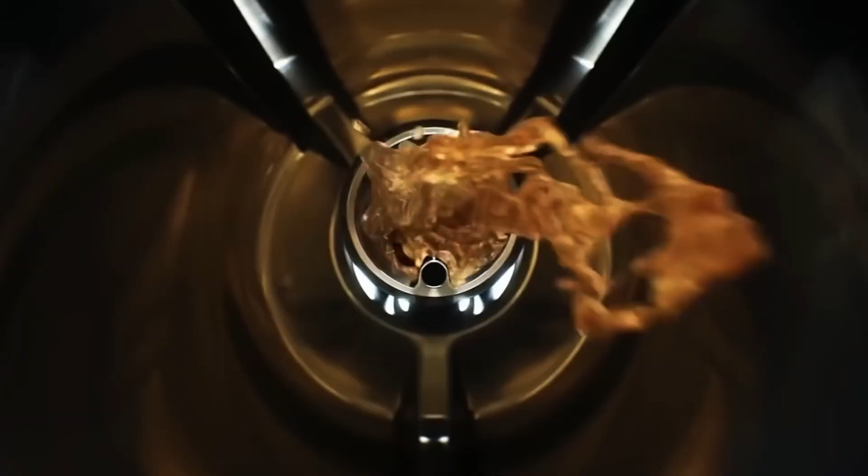The United States alone consumes over 7 billion liters of fuel daily, powering 800 million vehicles worldwide. But have you ever wondered how that fuel gets from deep underground to your gas tank? This is the complete story of petroleum, from the massive Texas oil fields where companies like Occidental drill one new well every day, to the sprawling refineries where crude oil is heated to 370 degrees Celsius and transformed into the clear, powerful fuel that makes modern life possible.

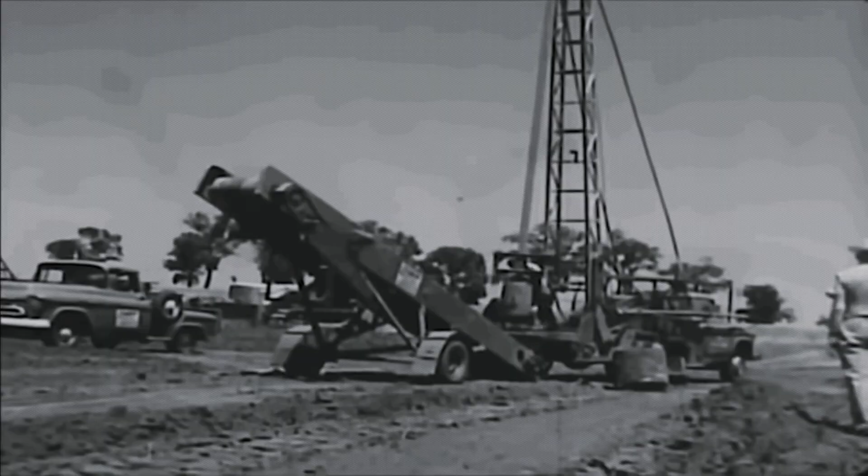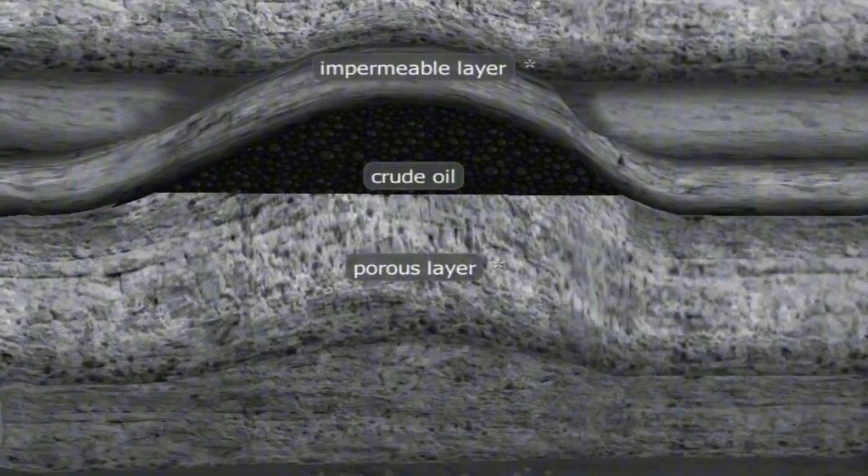What if I told you that the fuel in your car was once a living creature millions of years ago? It's a fascinating transformation that begins deep beneath the ocean floor. When ancient plants, animals, and microorganisms died in prehistoric seas, they sank to the bottom, gradually becoming buried under layers of sediment. Under intense heat and pressure, these remains underwent a remarkable chemical metamorphosis called catagenesis.

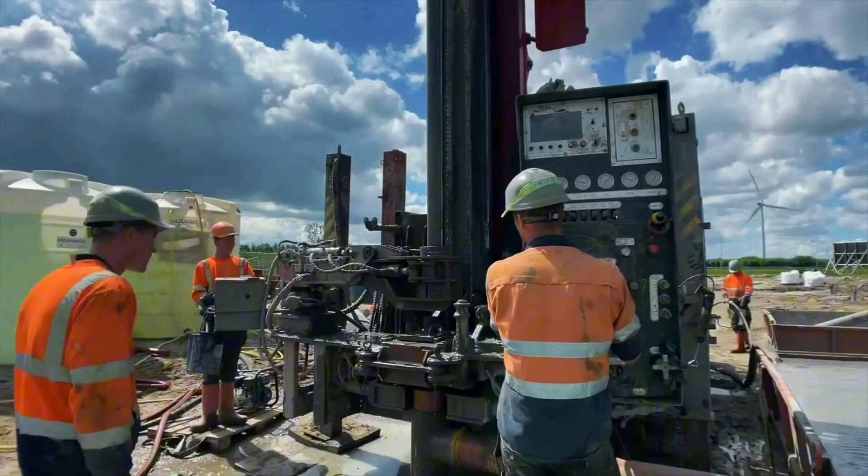This process didn't happen overnight. It took approximately 250 million years for these organic materials to transform into the hydrocarbon-rich substance we know as crude oil. Think about that time frame, 250 million years to create what our modern society consumes in mere decades. This stark contrast highlights our relationship with this finite resource. The oil powering your morning commute represents an ancient energy bank that took geological eras to deposit, but is being withdrawn at an unprecedented rate.

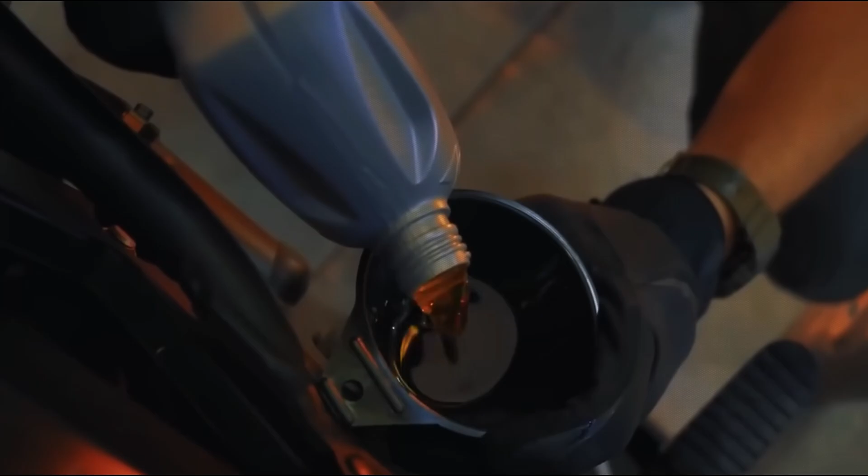Before we can use this sticky, smelly black liquid, the primary raw material for gasoline, we first need to find it. Modern oil exploration has evolved dramatically since the industry's Texas beginnings in 1894. The real boom started in 1901, but today's methods bear little resemblance to those early days. Finding oil beneath the Earth's surface requires sophisticated detection methods.

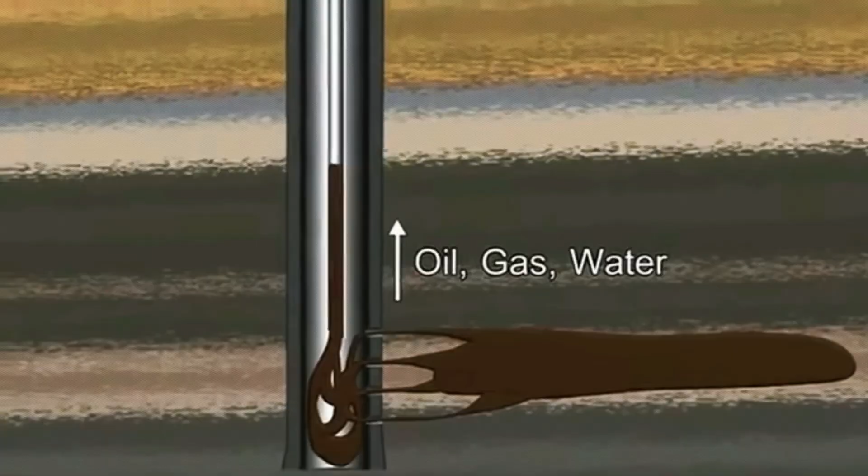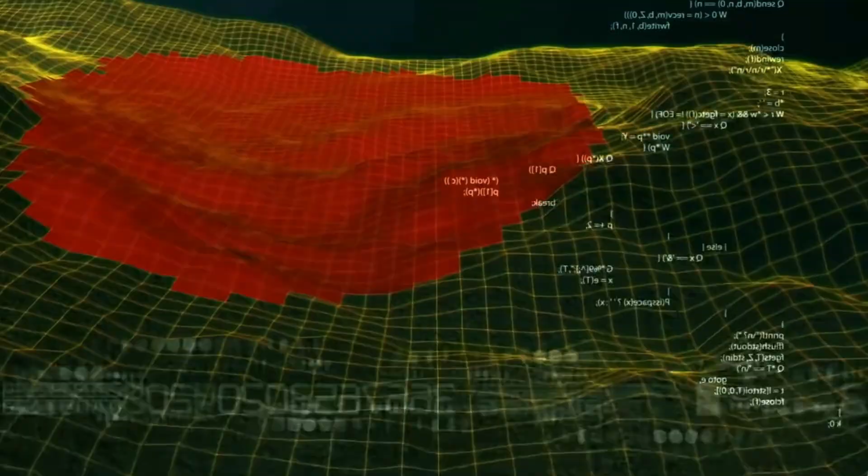Geologists now employ advanced seismic technology that works by generating sound waves that penetrate deep underground. These waves bounce off different rock layers and return to the surface, where sensitive instruments record them. By analyzing the time these waves take to return, experts create intricate three-dimensional maps revealing potential oil and gas deposits.

When examining these maps, geologists look for specific geological formations that typically trap oil. They search for anticlines, upward-folding rock layers, salt domes, and fault traps, structures that prevent oil from migrating further upward. They also identify porous reservoir rocks like sandstone or limestone that can hold oil, topped by impermeable cap rocks that seal it in place.

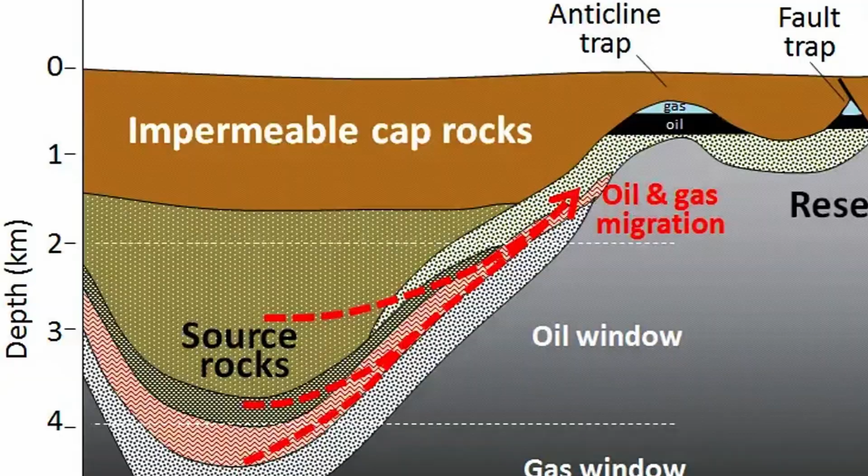Despite these technological advances, finding oil remains a calculated gamble. The subsurface geology is notoriously complex, with unexpected variations that can turn a promising prospect into a dry hole. Yet the scale of operations in places like Texas demonstrates both the economic incentive and industrial commitment to this pursuit.

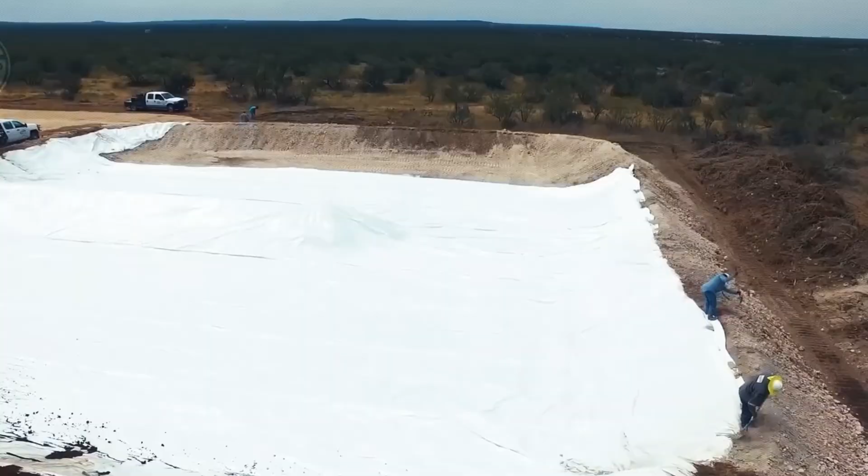The sheer magnitude of drilling operations in Texas oil fields is staggering. Each month, over 2,000 new wells puncture the Texas landscape, collectively extracting more than 900,000 barrels of crude oil daily. This continuous drilling is necessary to maintain production levels as existing wells gradually deplete.

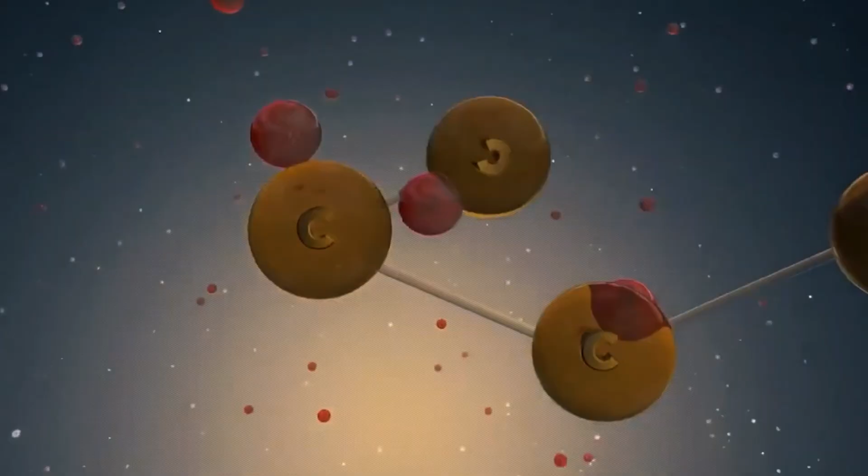Major players like Occidental Petroleum exemplify this relentless pace. To sustain their production targets, they drill approximately one new well every single day. This constant activity represents billions in investment and thousands of jobs, all dedicated to extracting a resource that lies thousands of meters beneath our feet.

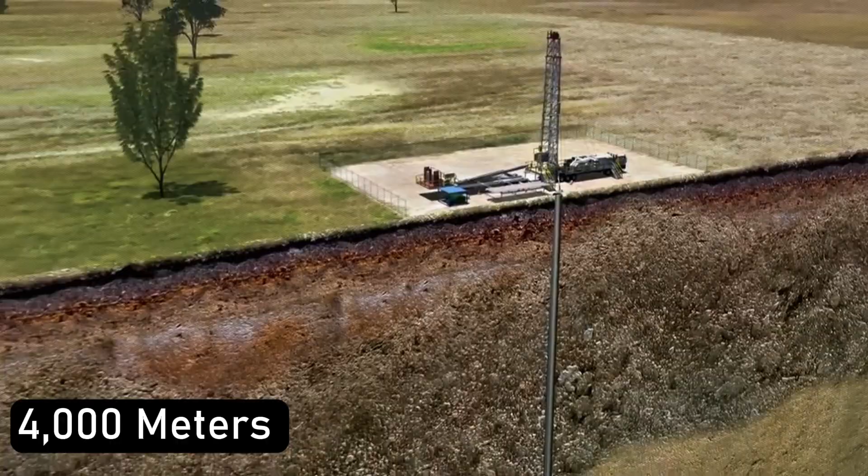The journey to reach these deeply buried deposits is an engineering marvel. Modern drills must penetrate up to 4,000 meters, nearly 2.5 miles, through various rock layers to reach oil-bearing formations. At these depths, drilling teams encounter extreme pressures and temperatures, while navigating through different geological strata with specialized drill bits and mud systems that lubricate and cool the equipment.

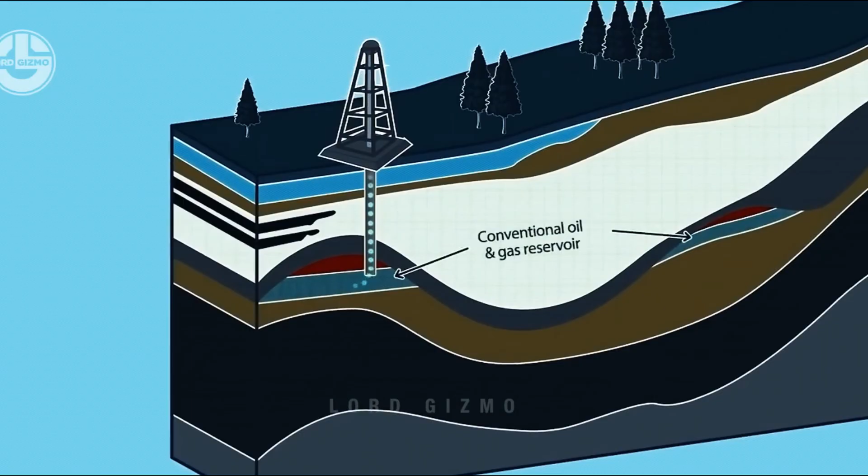Once a promising location is identified, engineers deploy seismic instruments that provide astonishingly detailed 3D maps of underground formations. These technological wonders allow them to visualize oil deposits with remarkable precision, identifying the optimal drilling points and potential extraction challenges before a single drill bit touches the ground.

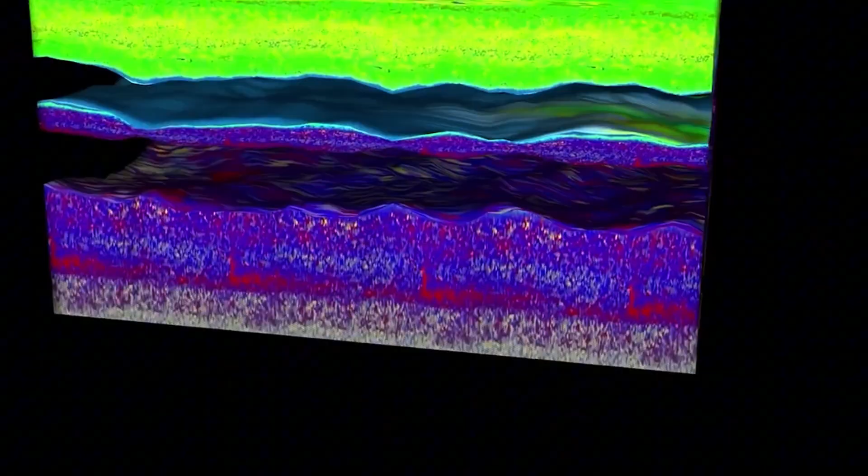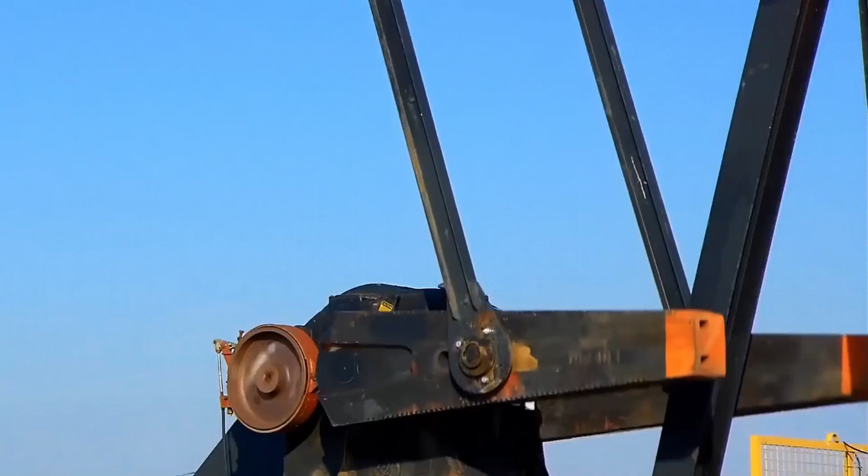While the seismic imaging technology pinpoints exactly where our crude oil resides, extracting it is merely the first challenge overcome. The viscous black liquid emerging from the wellhead bears almost no resemblance to the clear fuel it will eventually become. And between these two states lies a perilous journey, spanning thousands of kilometers through a complex web of pipelines few ever witness.

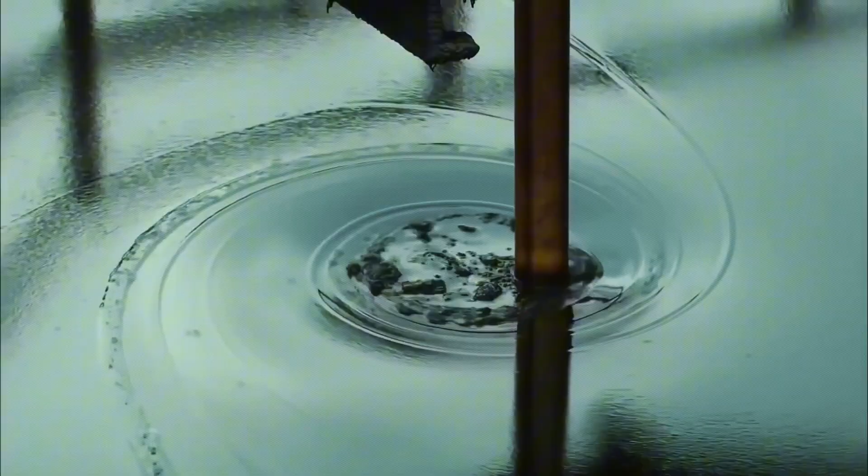This extracted crude oil, thick, sticky, and almost tar-like in consistency, must now travel approximately 1,000 kilometers to reach its destination. The journey connects two critical points in petroleum's life cycle: the extraction site where it emerges from the earth and the refinery where transformation occurs. Without this crucial transportation link, all the sophisticated extraction technology would be meaningless.

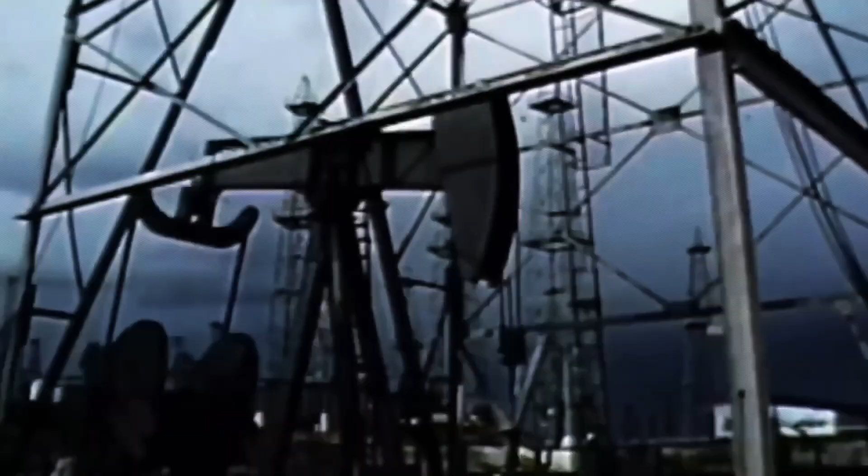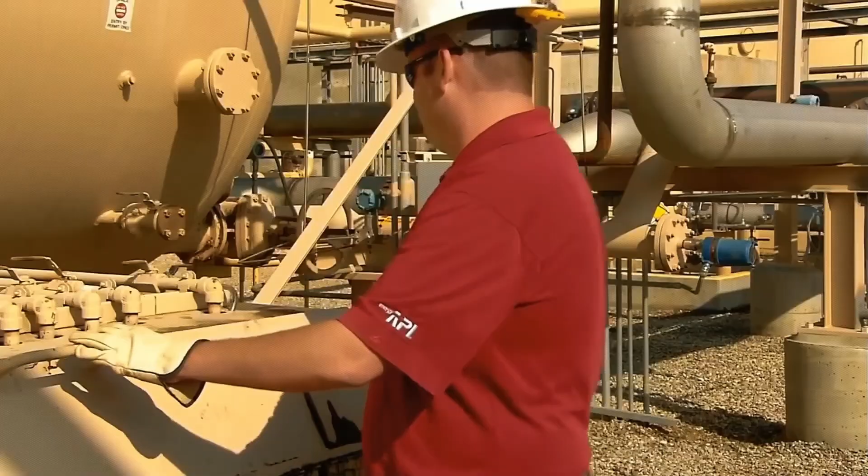The logistics of moving millions of barrels of highly flammable crude oil daily presents extraordinary challenges. A single pipeline rupture can release thousands of barrels into surrounding ecosystems within minutes, potentially devastating local environments. These concerns necessitate stringent safety protocols throughout the transportation network, with constant monitoring for potential weakness or damage points.

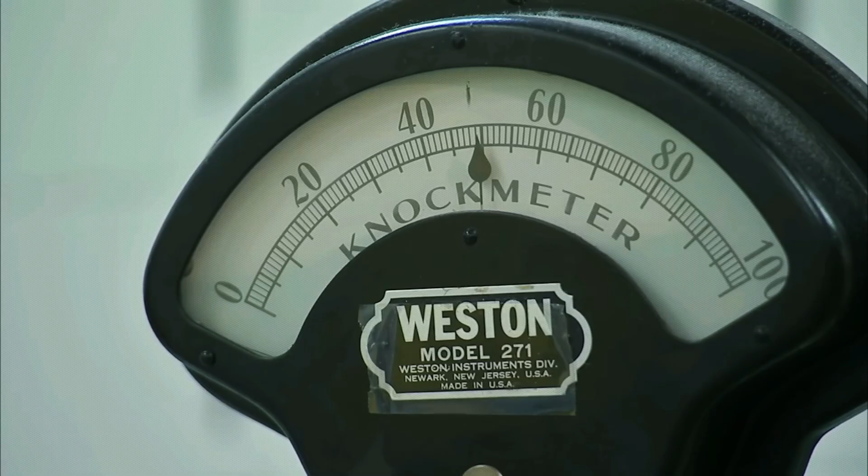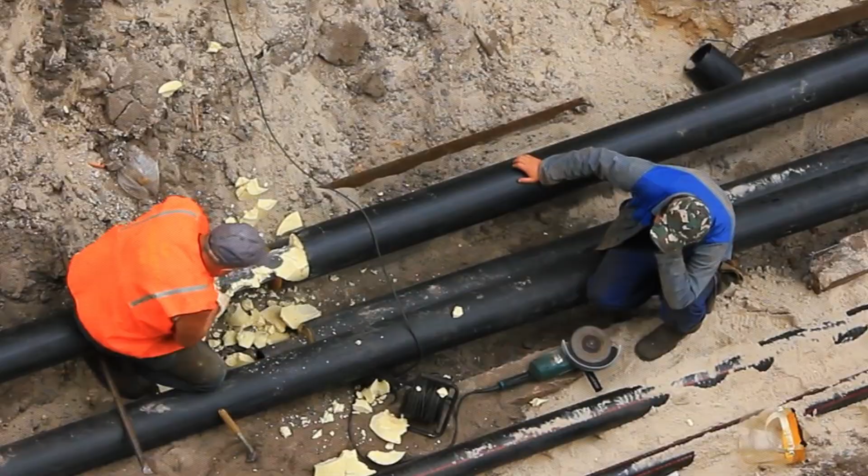Pipeline systems form the silent arteries of our energy infrastructure, efficiently moving crude oil across vast distances through an intricate network that operates largely unseen. These underground pathways consist of specialized pipes designed to withstand tremendous pressure while carrying volatile materials. At regular intervals along these routes, pumping stations maintain the necessary pressure to keep the crude flowing smoothly toward its destination.

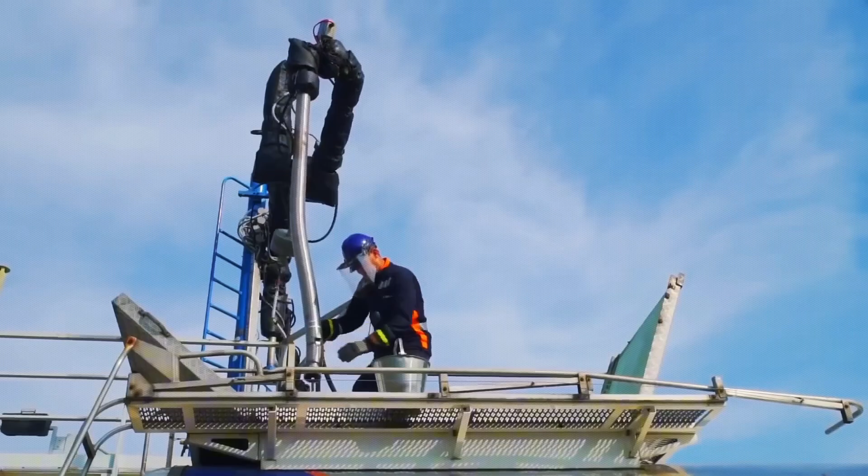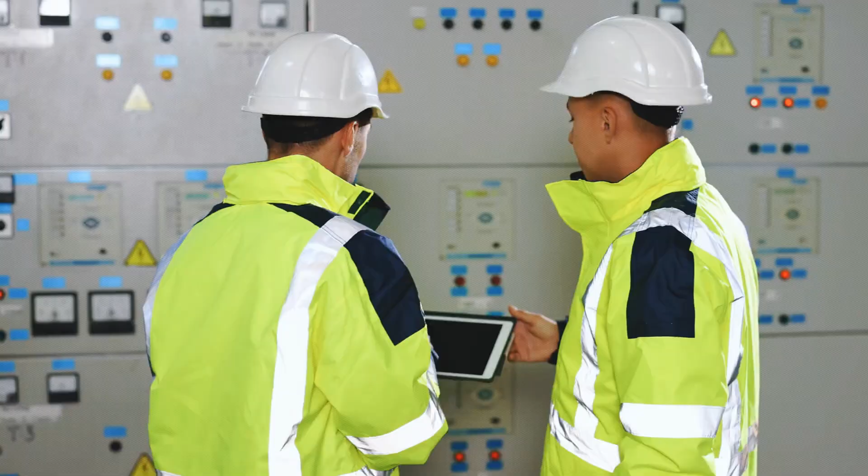These pumping facilities are engineering marvels in their own right, using precisely calibrated systems to maintain optimal pressure throughout the network. Too little pressure and the thick crude stalls, too much and pipes risk catastrophic failure. Engineers monitor these systems around the clock, making minute adjustments to accommodate changing volumes, viscosity variations, and environmental conditions that might affect flow rates. After its long journey, our barrel of crude finally arrives at its destination, America's largest oil refinery.

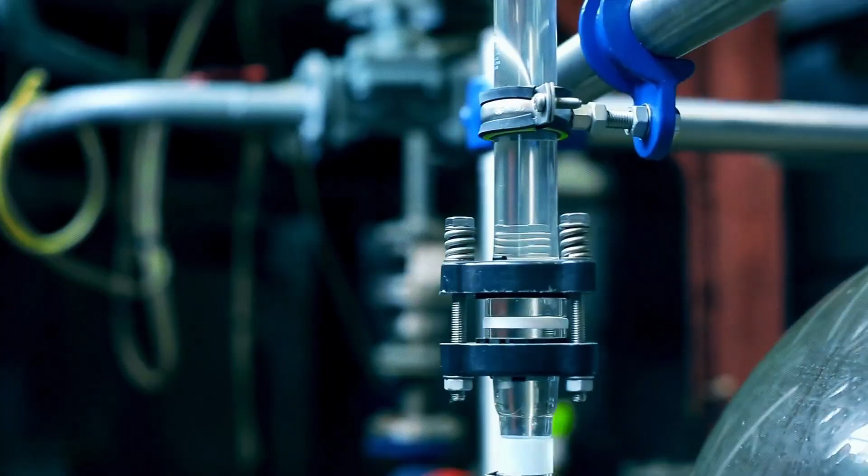This massive industrial complex spans an impressive 10 square kilometers and processes an astounding 562,000 barrels of crude oil every single day. The sheer scale of this operation becomes even more apparent when considering the 4,000 workers employed here, who collectively use over 1 million ear protectors annually just to protect themselves from the constant industrial noise.

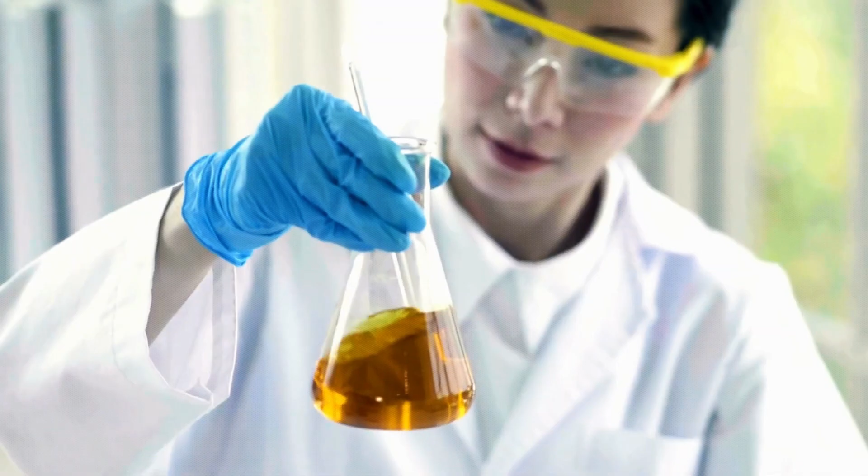Before any processing begins, each incoming batch of crude undergoes rigorous quality assessment. Laboratory technicians analyze samples to determine the oil's specific composition, which varies significantly depending on its geological origin. These tests reveal crucial information about the hydrocarbon mix, sulfur content, and other properties that will determine exactly how the refinery processes this particular crude.

The results of these assessments directly influence how engineers will approach the refining process. Different crude compositions require different treatments, temperatures, and catalysts to maximize the yield of valuable products. Based on these initial findings, technicians prepare for the transformation process by setting parameters for the coming operations.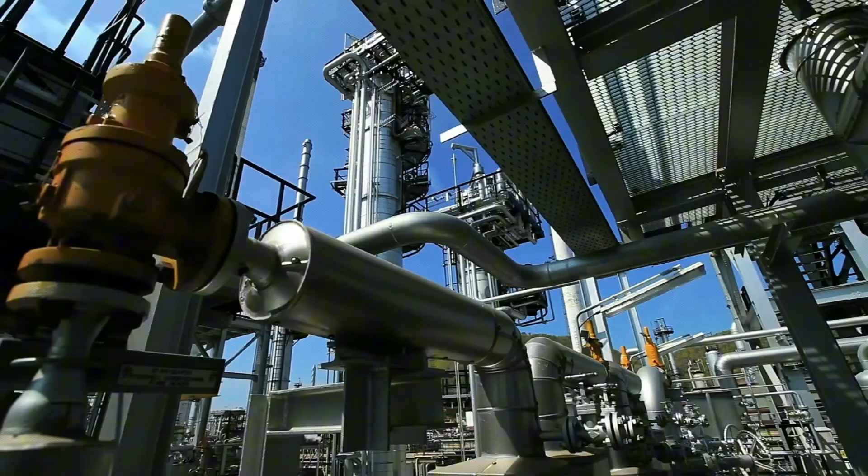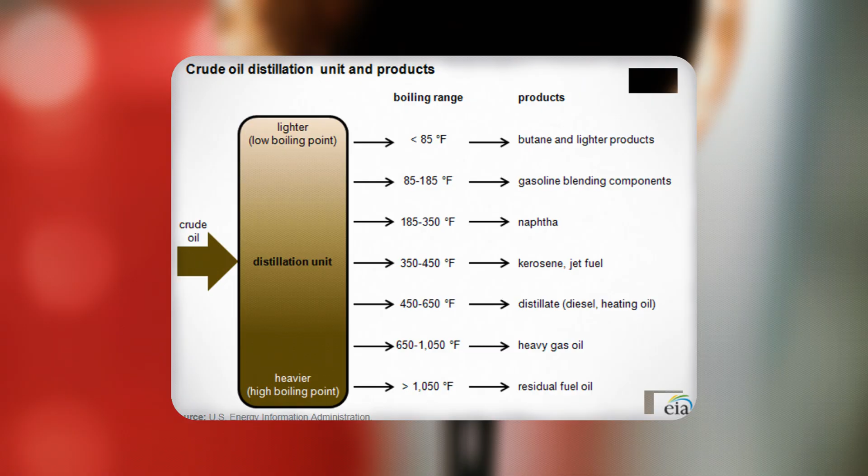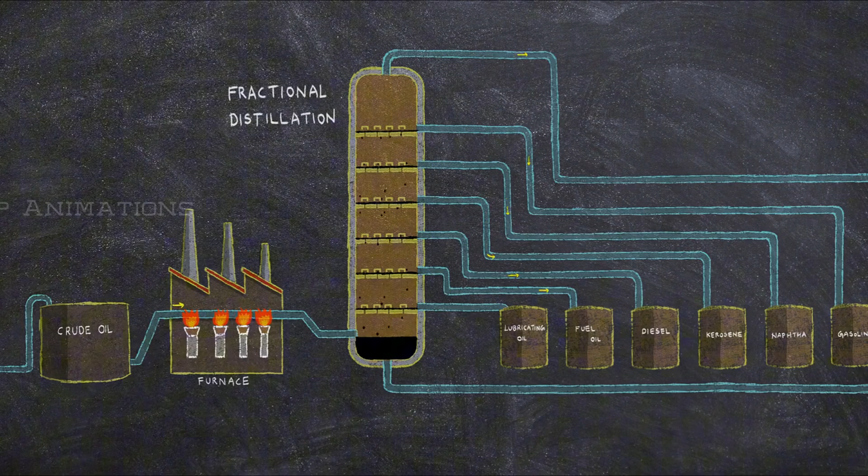As our barrel prepares to enter the refining process, it faces its most dramatic transformation yet. The refinery will heat this thick black liquid to temperatures exceeding 370 degrees Celsius, initiating the separation process that turns raw crude into everything from aviation fuel to the building blocks of plastics. This extreme heating marks the beginning of fractional distillation, where different hydrocarbon compounds will separate based on their unique boiling points.

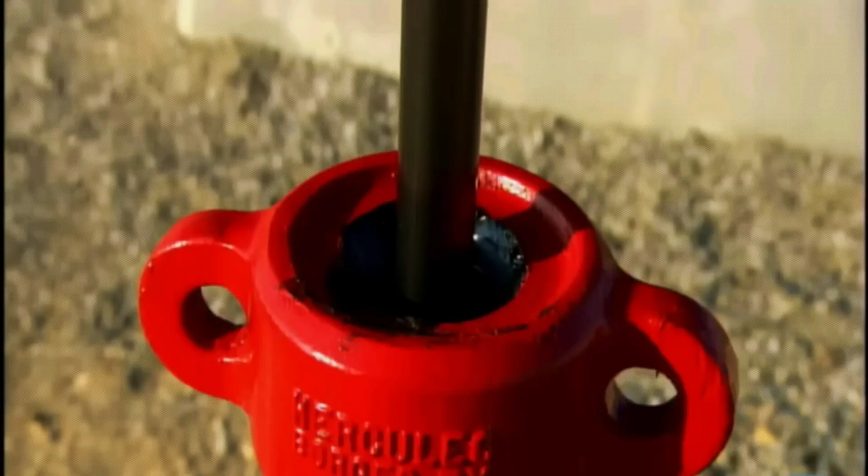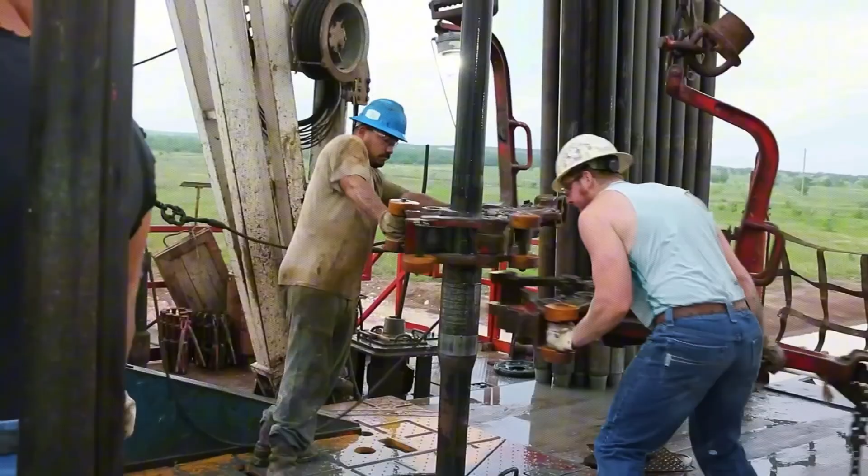The engineering challenges overcome to reach this point are remarkable. Consider that the oil extraction process required drilling through kilometers of solid rock, navigating complex geological formations, and bringing up material from depths few human-made objects ever reach. The sophisticated drilling technologies that make this possible represent centuries of innovation in material science, engineering, and geology.

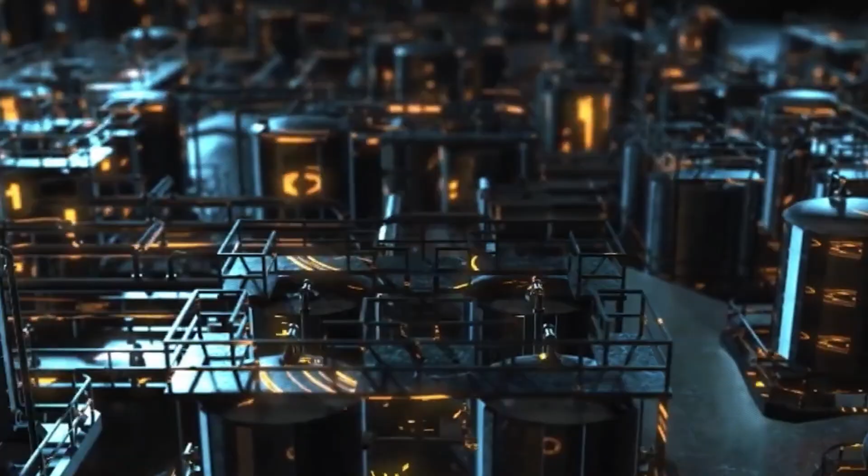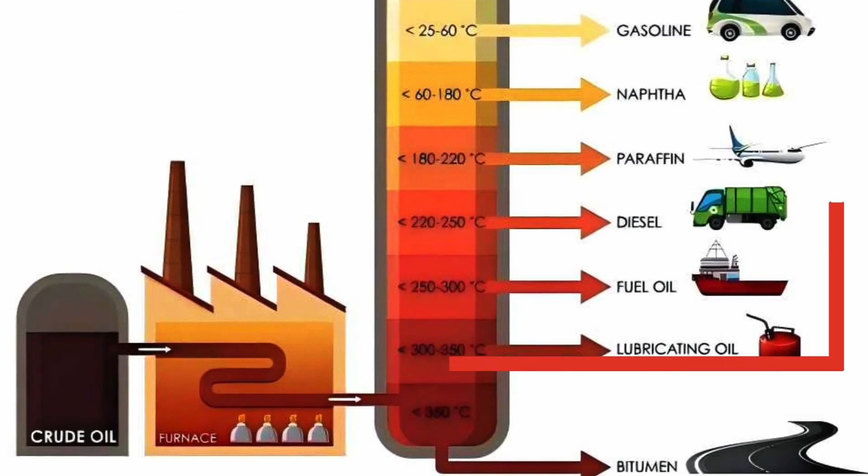This extreme heat initiates a cascade of precise separations that transform a single substance into dozens of distinct products, all while operators maintain vigilant control over processes where the margin between efficient production and catastrophic failure is measured in mere degrees. This critical heating stage represents the beginning of the refinery's most impressive feat: fractional distillation.

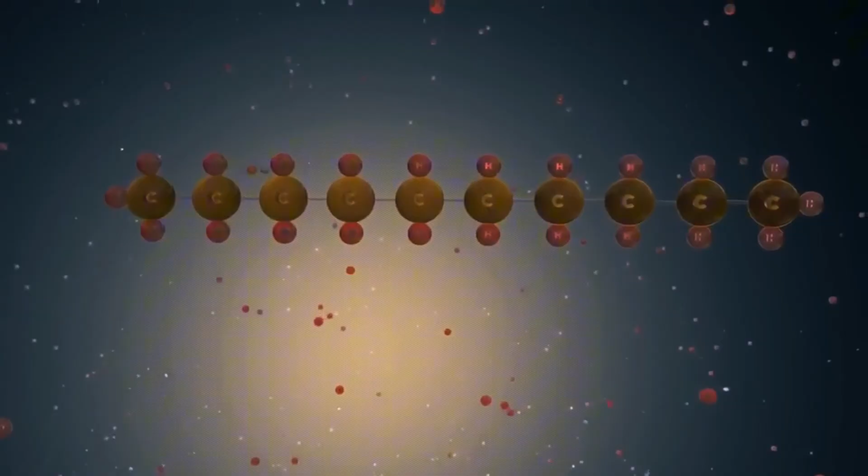As crude oil reaches these blistering temperatures, it doesn't simply boil, it vaporizes into a complex mixture of hydrocarbon molecules. Each of these molecules, distinguished by their unique carbon chain lengths, will soon find their proper place in the production hierarchy. The heart of this separation process occurs within towering distillation columns, massive metal structures where physics and chemistry work in harmony. As the superheated vapor rises through the column, a fascinating natural sorting begins.

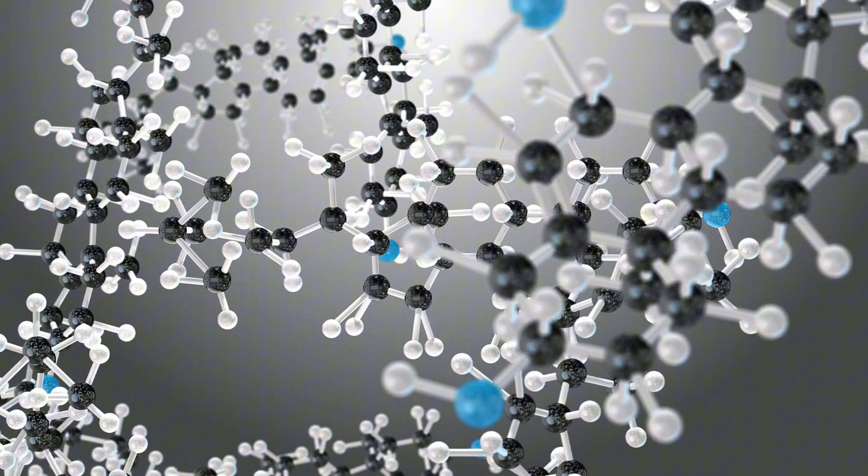The heavier hydrocarbon molecules with their longer carbon chains condense first at the lower, warmer sections of the tower. Meanwhile, lighter molecules with fewer carbon atoms continue their upward journey, only condensing when they reach cooler heights that match their specific boiling points. This elegant separation creates a natural stratification within the tower.

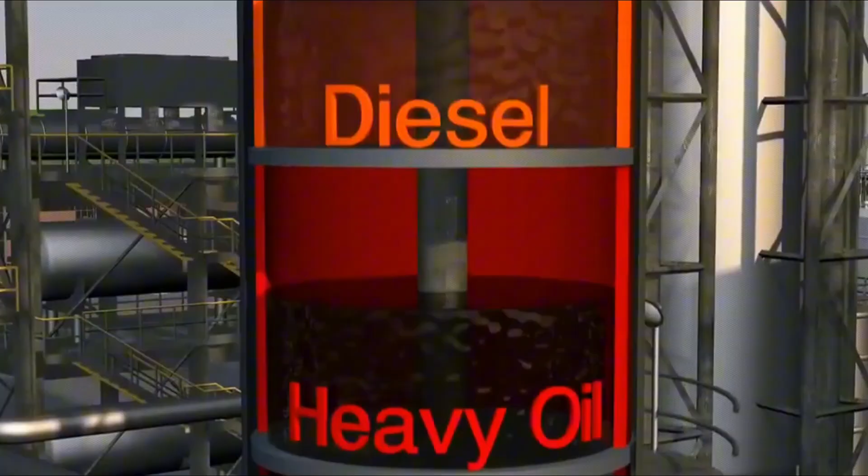At the bottom, the heaviest residuals settle, thick, tar-like substances destined for asphalt production or further processing. Moving upward through the column, we find increasingly lighter products. Heavy fuel oils give way to diesel, then kerosene, followed by gasoline components, and finally at the tower's summit, the lightest gases like propane and butane.

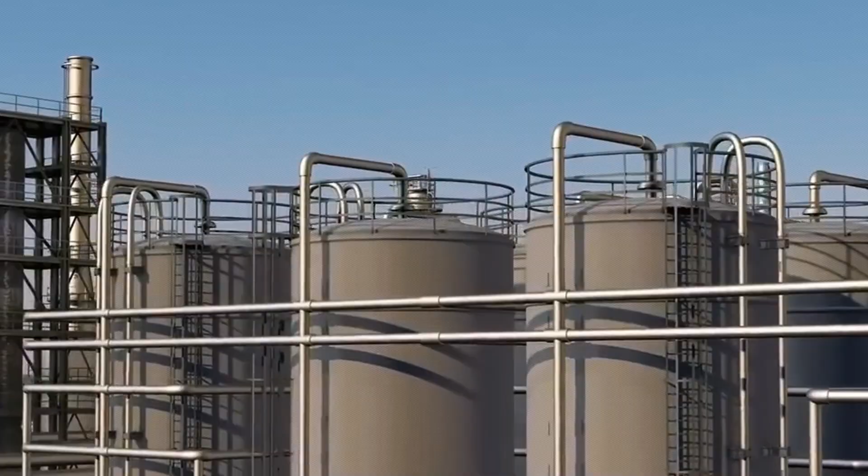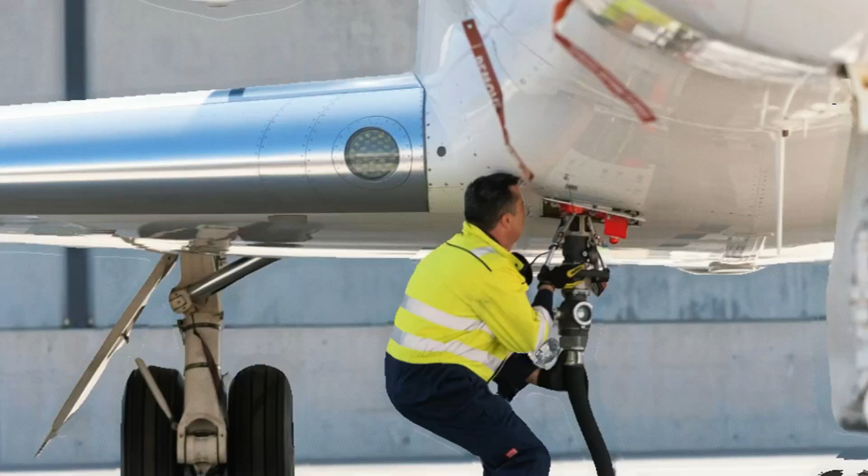The precision of this separation process yields remarkably consistent output ratios. From every 191 liters of crude oil that enters the system, the refinery extracts approximately 88 liters of gasoline, nearly half the original volume. The remaining output includes 48 liters of diesel fuel, 26 liters of kerosene, crucial for jet fuel, almost 7 liters of propane, and 32 liters dedicated to other essential products ranging from lubricants to the building blocks of plastics.

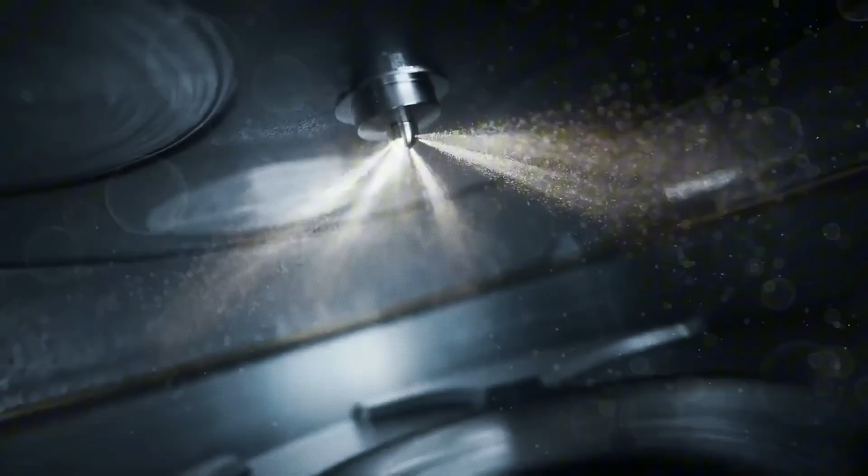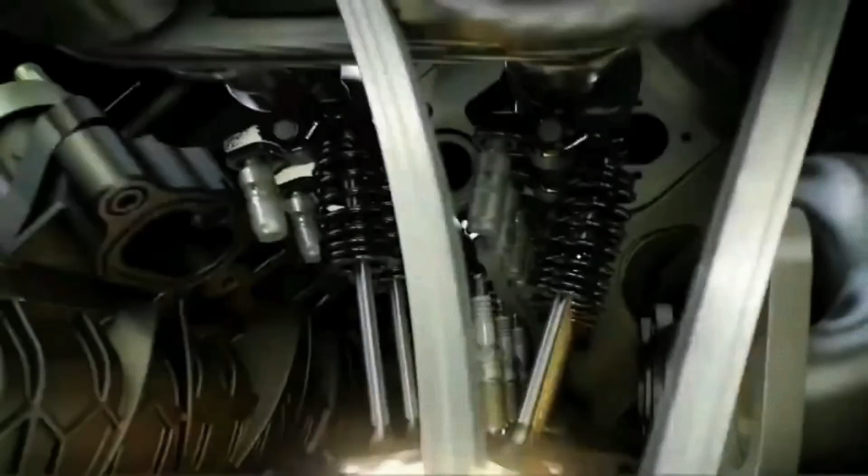Quality control represents another critical dimension of the refining process. Take gasoline, for instance. Its performance characteristics must meet exacting standards before reaching your vehicle. Specialized testing engines evaluate the fuel's resistance to knocking, a potentially damaging condition where fuel ignites prematurely in an engine's cylinder. These laboratory tests provide immediate feedback to refinery operations, allowing technicians to adjust formulations when necessary and ensure consistent quality across millions of liters of production daily.

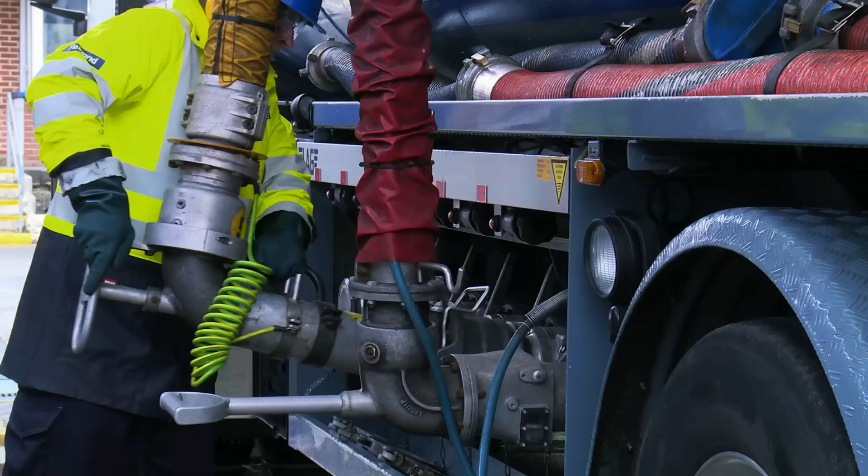The journey from distillation tower to gas pump requires another layer of precise handling. After separation and quality testing, gasoline flows through underground pipelines to nearby terminals. There, tanker trucks undergo a carefully choreographed loading process. Each truck must be grounded with a special cable to prevent static electricity. A small spark could ignite fuel vapors with devastating consequences. Additional safety systems include overfill protection sensors and vapor recovery pipes that capture emissions, preventing both waste and atmospheric pollution.

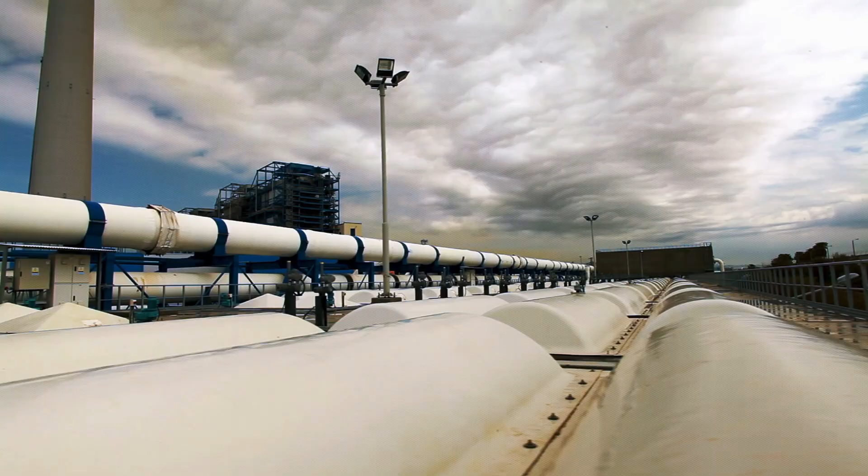The scale of this distribution system is staggering. Approximately 4 million liters of gasoline alone leave the refinery daily, traveling through a complex network of pipelines, terminals, and finally, tanker trucks bound for thousands of gas stations. This intricate delivery system operates continuously, ensuring fuel availability whenever consumers need it.

What we've witnessed is not simply a fuel-making process, but the transformation of an ancient resource into the backbone of modern civilization. Beyond powering our vehicles, crude oil silently permeates every corner of our lives through plastics, tires, cosmetics, pharmaceuticals, and countless other products we depend on daily.

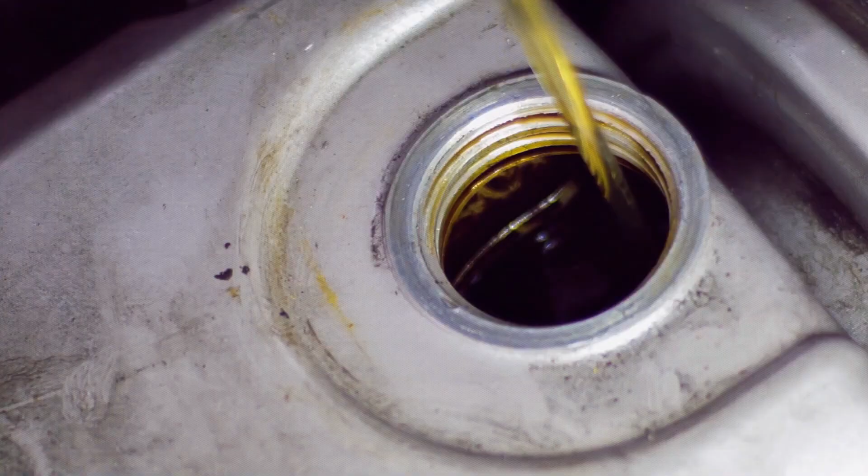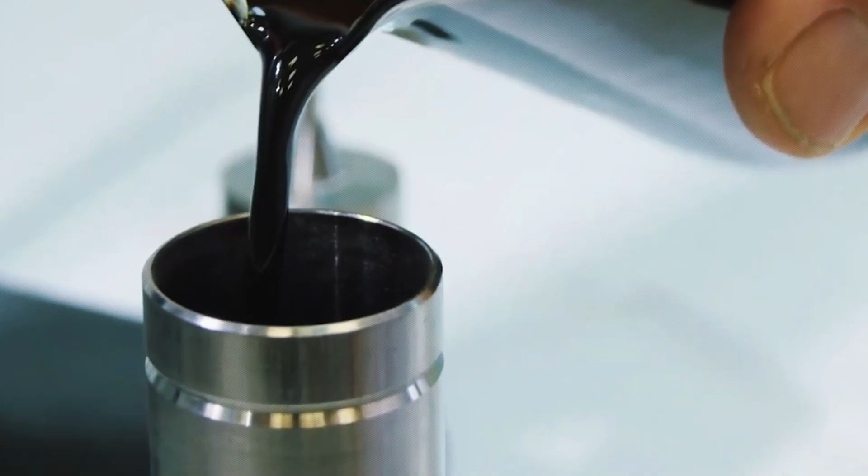Yet this versatility comes with responsibility. As we extract billions of liters of this finite resource daily, we're consuming what took nature eons to create. Understanding this intricate journey, from underground deposits to refined products, helps us recognize petroleum's true value, while highlighting why developing sustainable alternatives isn't just environmentally sound. It's essential for our continued progress in a world with diminishing natural resources.